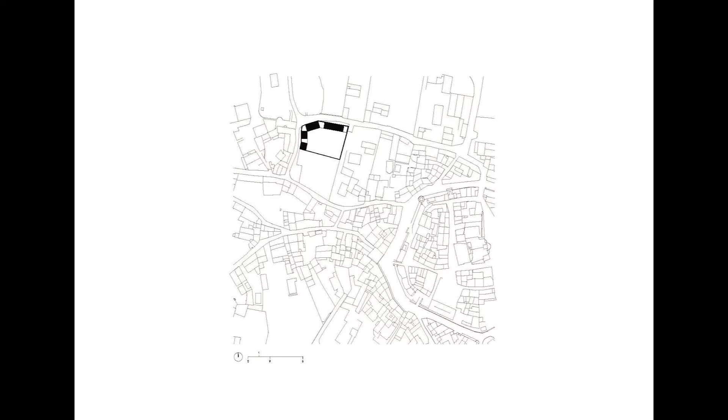It's a typical town in a place called Costa Brava in the north coast of Barcelona. Beautiful village, narrow streets, that kind of heritage that is more a thematic park than a real village, but it is that. This is a beautiful village with an old part of the city with that kind of wall, dense urban fabric, with narrow streets that go from the center to the countryside. The case of the house is a beautiful plot with an agricultural origin, with that kind of heritage. We are not different, I suppose, from the rest of the architects; we try to begin our projectual process trying to understand the reference of the context.

And in this case, the reference was absolutely clear. It was that huge, beautiful wall that surrounds the plot, and it was the main reference to begin the design process. So for us, it was clear that it should be a house that works linked, plugged to the wall, as large as the wall is, and it's a weekend house. So we tried to develop a very extreme house in terms of typology, because it's just a pure porch as large as the wall. This was a beautiful idea that became something like that. It was good for the client, it was good for us.

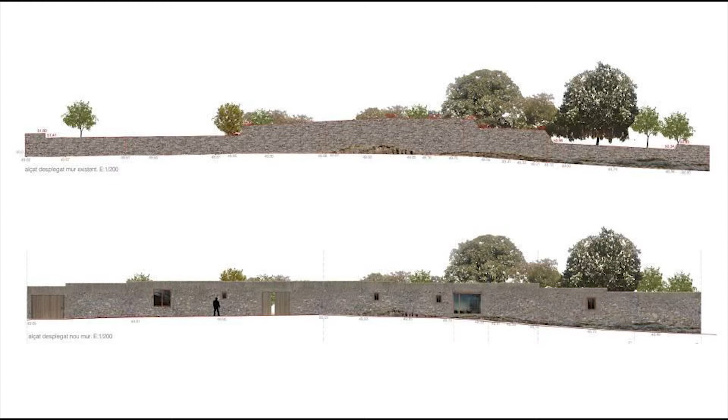So it was a big crisis for the office. But as we say in Spain, no hay mal que por bien no venga. When there's something bad, at the end there's something good. And in this case, that crisis meant understanding what is really important in front of the matter, which is the behavior of the matter, not the memory. The memory, of course, is beautiful, is interesting, the heritage in terms of composition, but the first step is to understand the real behavior of the matter that you have in front.

And from the point that it was impossible to maintain the wall in the same place, our decision was to demolish the wall and to rebuild again the wall, not just for memory, but understanding that the original stones were still able to work in a structural way. Okay, so the behavior of the matter was already there to be used again. So it's a clear case of reorganizing the matter.

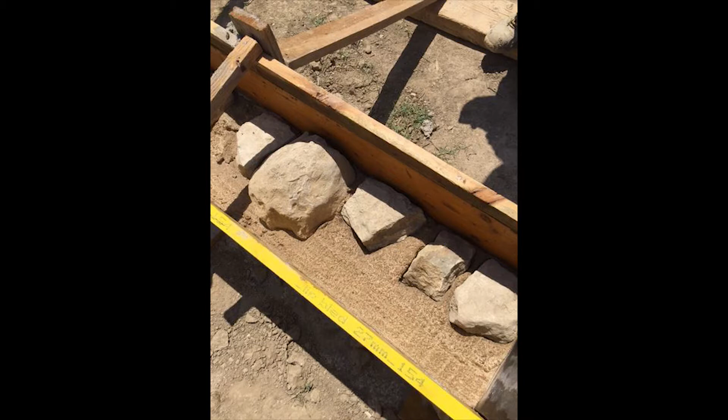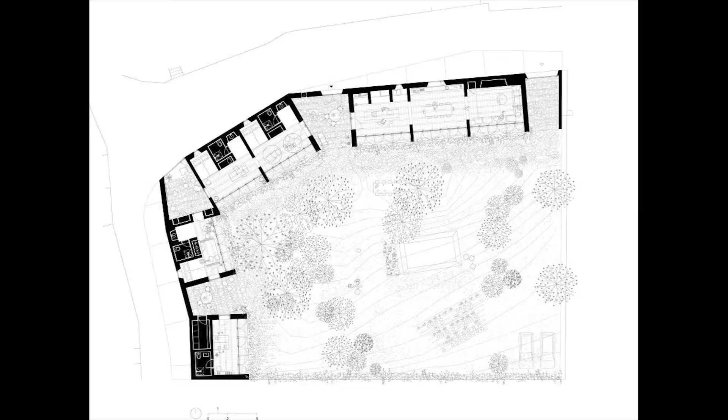So we mix the lime with the soil of the place, with the big stones like this in layers of 10 centimeters, doing this typology, which is a clear porch house. It's a little bit extreme. It's a weekend house where there's no heating system, there's no climate system apart from the passive behavior of the whole house.

And the wall was so big that we got stones enough not only to do the wall, but also to do the inside walls and also to do the pavement of the garden. At the end of the process, we just had to take off the thin layer of concrete that hides the stone to recover the color of the old stones. So I think for me it's a perfect example to explain.

Of course, I have some examples about different positions in front of the preexistence, in front of the heritage. But for us, the first approach in front of any kind of matter, any kind of presence, is to understand how it can work. So the new wall with the geometry that the council decided is like this. You can see how the old geometry has disappeared and has moved.

And on the other side, the house is just a full porch that faces to the south, that faces to the plot, and I have to say that it's incredibly beautiful. It's a perfect customer. I know that it's not always like this, but you have to imagine how bad the news from the council was. So it's a little bit of balance between the perfect client and the perfect place with a high-level difficulty process.

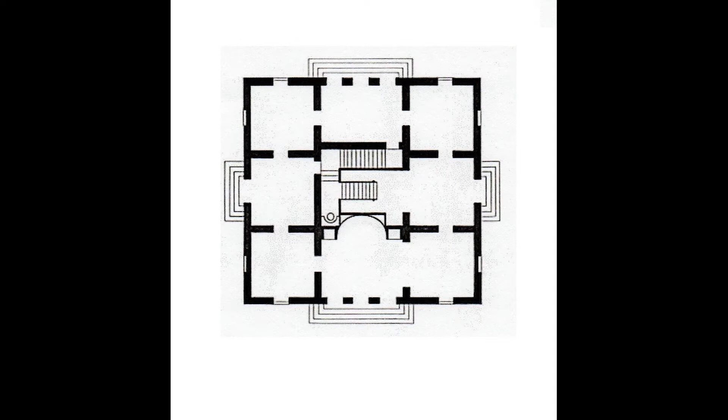We understood later that the shape, the form of that kind of vernacular that we were attracted to, was the result of a structural concept, which was the structural walls that just work in compression, okay? Then, like 15 years ago, we visited that building. It's not a vernacular example, it's not a popular construction, it's the Schinkel Pavilion in Charlottenburg, okay?

But it was walking through those cells, walking through that group of spaces, that we understood that the structural wall is not only an element, a structural behavior, it is also a system that not only defines the structural part, but defines the geometry of the space. This is something so simple, but for us it was like a big discovery.

There's a great professor in Barcelona called Ignacio Paricio that wrote an article about that idea, comparing the two big families in construction. On one hand, we have the multi-layer systems. That means that we use specific products or specific materials for specific answers to the demands of the building, okay? On the other hand, we have that kind of construction where structure and enclosure, structure and geometry of the space, are the same thing.

Paricio didn't say that one is better than the other. But he said that in the multi-layer systems, the specific layers can never get old. If they get old, it doesn't work. When a part of the facade of a new hospital or of a skyscraper doesn't work properly, the whole facade doesn't work. So it can't become older. It's impossible. It always has to be new. Doesn't matter if it's 50 years, 100 years.

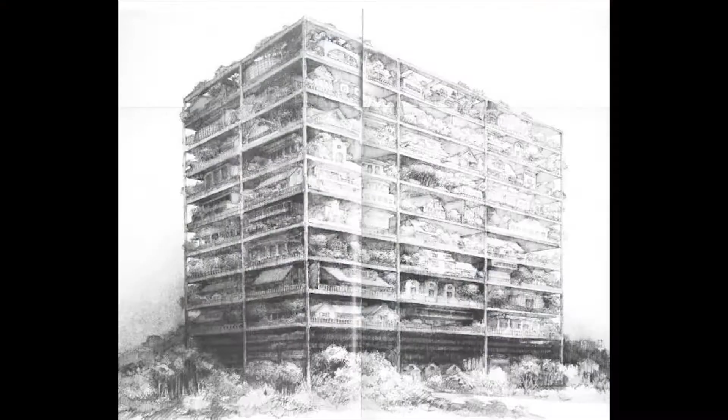Energy is matter, of course. It's a thermodynamic base, no? It's a topic of thermodynamics, so it's maybe the most obvious approach to the idea of matter, that energy is matter, and matter is energy. And what we've done was a little bit introduced in the house before. We have understood that buildings have two elemental parts: a structural part that is there to support the activity of living, the activity of people, and the enclosure, the envelope, that is there to protect the activity of living. Those two parts are in all buildings. It's an elemental part of construction and of architecture.

What we tried, and what we keep on trying, is to ask these elemental parts, structure and envelope and protection, to perform as many roles as possible. Not only to be structure, but also to be acoustic design. Not only to be structure, but also to be the geometry of the space.

Not only to be structure, but also to be the system that gives climate conditions to the space. The same with the skin of the building, not only to be the rainproof layer, but also, in this case that we're going to see, to be also an insulation system that gets gains from the sun, or that produces ventilation, and so on. Then, in our opinion, the elemental parts of the building, if you ask them to do as many roles as possible, become fundamental in the idea of architecture.

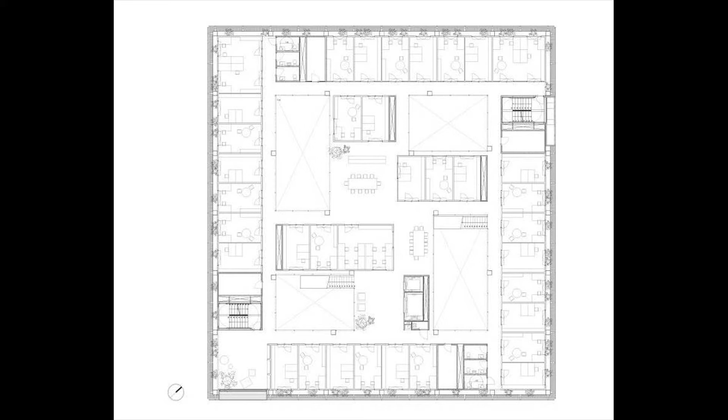It works by itself. What does it mean? It works in acceptable conditions thanks to the nature of the building. That means geometry and matter. Because of the inertia, the geometry, the cross ventilation, the kind of facade, it produces internal conditions by its nature. It's not thanks to a machine. Okay? That's not possible in the inside offices that have to meet specific standards of climatization, so it's the two kinds of climates.

In the end, we discovered that it was not two climates. It was at least 6 different kinds of climates in the building, and we dealt with that with a basic strategy. This is, in the end, a building that in fact is a greenhouse, a real greenhouse, a standard greenhouse from a catalog, built by a company that builds greenhouses, with a concrete structure inside with a lot of inertia.

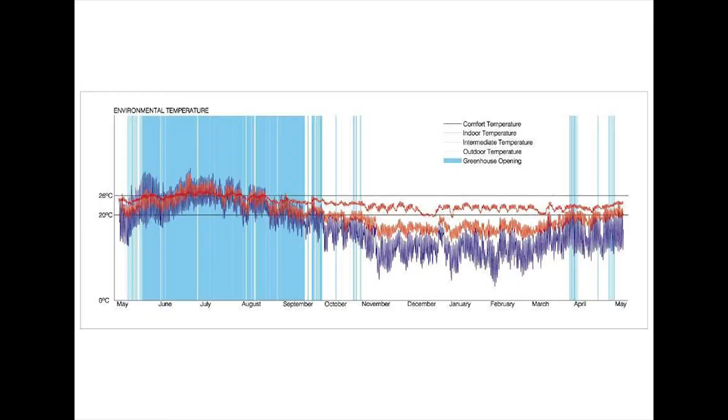That combination of the greenhouse working as a greenhouse in winter and as a shading system with a lot of ventilation in summer, also with the inertia, and trying to control with CFD simulation how the air is going to move in the building, got us to these kinds of diagrams: the intermediate space without inertia moves here, and with the inertia, just with its natural behavior, you get into 20 to 26 degrees.

So the two elemental parts are on one side the structure, and here you have the intermediate space, the offices. You have on one side that heavy structure, that we were interested in that idea of heaviness, not because of the beauty of the concrete, but because that amount of inertia was basic to stabilize, to give you the concept of inertia.

At least for us in Barcelona, it's very clear to understand how important inertia is as a possible passive strategy. What does inertia mean? When we live in Barcelona, we are close to the sea. That means the temperatures are always softer than at the same moment 100 kilometers inside the land, because the sea works as a big inertia that absorbs the excess of heat in summer and gives it back to you in winter. So that's the inertia concept.

It's simple, it's clear, and it's really famous that in Granada it's full of houses that work by themselves into caves, into original caves. Why? Because you have the inertia of the mountain over your head, and you move between 17 and 25 degrees the whole year in Granada with very extreme weather outside. So in the same sense, like a cave or like the sea, we try to put a lot of inertia into the building to stabilize, to make the temperature range softer.

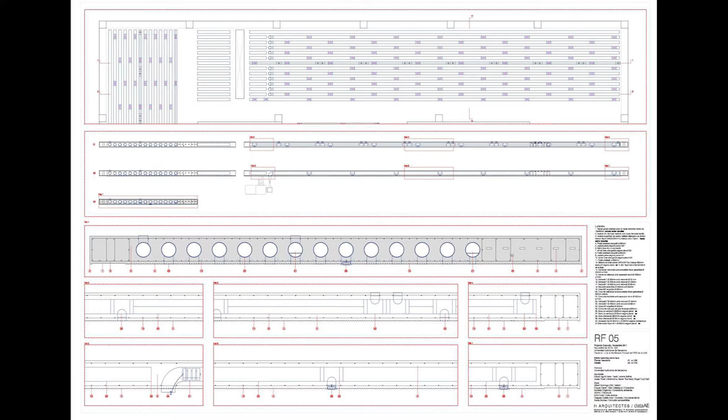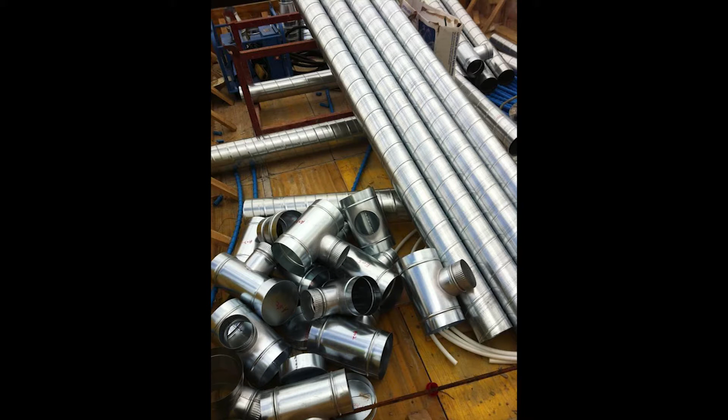But it's not the only thing that the structure assumes. It's not only the inertia, it's also the ventilation system of the building, the pipes that cross the structure. It's not only that, because it's also the system of the acoustics. The precast slabs have that texture to help a little in the acoustic comfort, and so on.

So it's that idea I was trying to explain, to ask the structure to have more roles than only the support role. On the other hand, the active systems are also in the slabs, so the slab became something very complex with a post-tension system and so on.

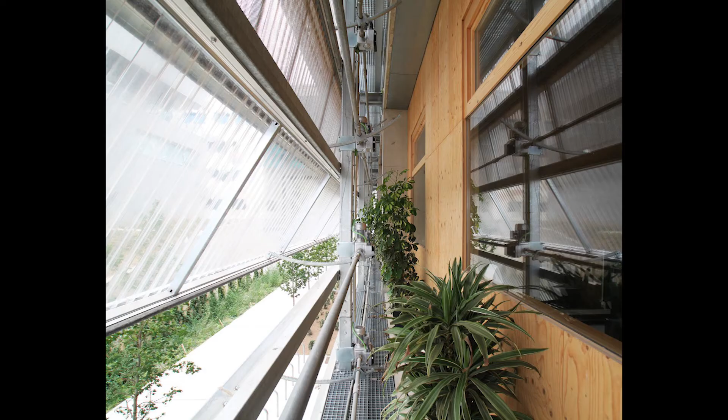And on the other hand, the skin, a skin that is able to be closed in winter and open in summer, assuming shadow roles and also insulation roles, that moves and mutates, changing in front of outdoor and indoor conditions. The skin is moving, trying to produce comfort conditions, not only for human living, but also for vegetation living.

Another way to understand the preexistence of matter, what is already there, or the idea that architecture is about reorganizing matter, is to understand that there is a type of already-there material which we call product. A product, a brick, a timber panel, a CLT panel, is a product that exists before our projectual process. So in the same way, we try to understand what the specific behavior of that product is, as a way to develop our design process.

So, what here, well, it's an example about—it's not exactly the same, but that idea to deal with the catalog architecture.

We did that students' residence, which is a complex situation, because it's a residence for—we teach in the same school where we studied in the 90s, and we won the competition for the students' residence. That means a competition where all the colleagues in the school were interested to win. So it's a complex process in terms of getting enemies during your life, because not only the colleagues, but also the students that you then meet at the classroom, maybe they are angry because of our design. It's not the case, so we're happy to say we have no more enemies now than 10 years ago. But this competition is an interesting process.

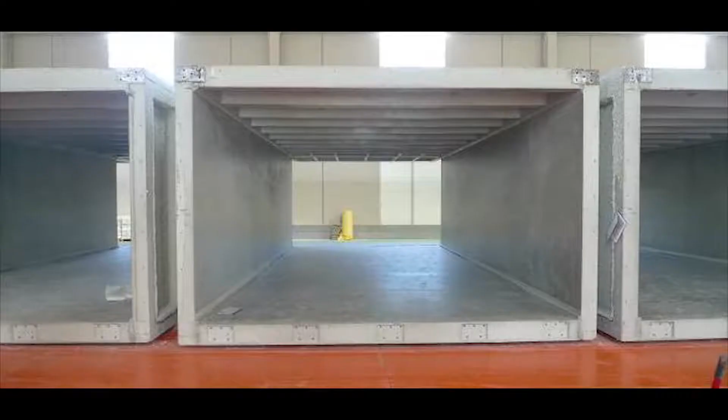So the one who won the competition for the management was not a professional of management, but a professional of construction specialized in building this. The main condition for the architectural competition was that we had to manage with this product—a clear product. And it was not our idea or our decision to work with this.

We assumed we won the competition for several reasons, but the important and interesting part of the design process was to understand the positive parts of the geometry of the matter and give value to that, because you have to imagine that the builder who produced it was absolutely ashamed of its own product.

For him, this is just a skeleton, just a frame to place plasterboard, plaster, cardboards, furniture, curtains, to hide the concrete. This was necessary because the concrete was not enough in terms of fire protection—it was too thin. In terms of acoustics, it also needed something else.

So our design process—and this is the interesting part to explain that idea of product, to understand again the attributes of the matter—was to see how to make it better, to let it look as it is. We worked with the engineers of the company to see how to put another steel bar that assumes, in case of fire, the structure can be non-protected, or to add more insulation for acoustic conditions. Just to ensure the good part of the product was kept: the concrete aspect, the geometry, the heaviness, and the inertia.

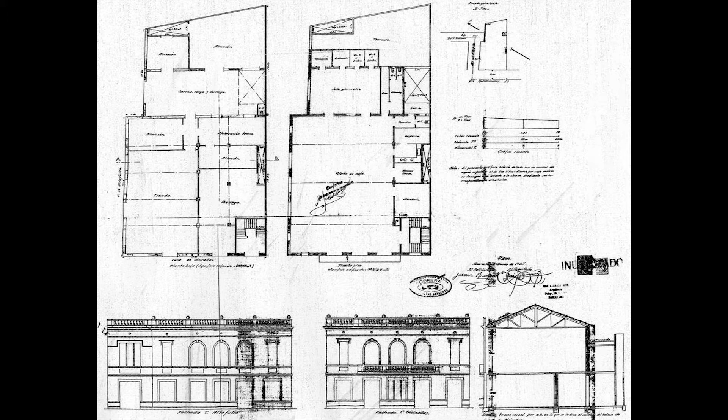So we respect the facade because it was also a condition of the competition, but on the inside, the building was not catalogued, was not protected by the council, so we were free to demolish the whole building.

What we decided, by understanding the original project—because the building was closed for 15 years, and during the whole 20th century after the Civil War it went from a sweets factory to a disco to another storage space and a lot of different programs—so the original architecture became very blurred through the years, and we tried to recover the original project to understand the structural parts of the building at the moment we began the competition.

And we saw that the original project was not specifically interesting. In fact, the architect never visited the plot, because the street has a very serious slope, and in no plan is the slope of the street accounted for. So it's not an incredible architecture example.

In fact, it's not protected, it's not catalogued. But our approach is again to understand the attributes of the matter, and in this case the attributes of the building. So we decided that not all the spaces were interesting in terms of quality, but there were spaces that, regardless of architectural quality, could work again in terms of program with new uses. So we decided to demolish not the whole building, but just a part that responded to part of the original program.

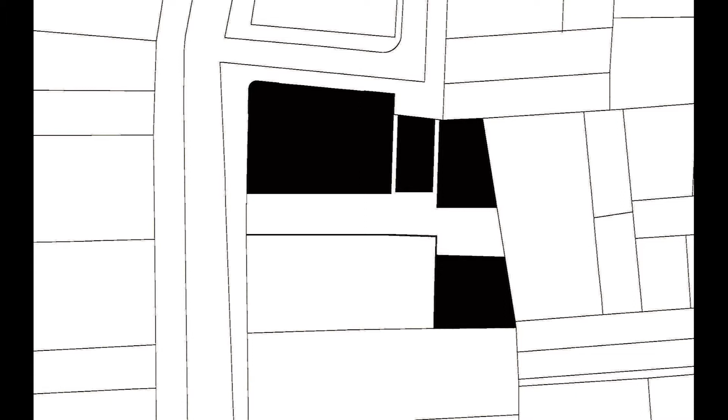And thanks to that decision, that very specific and well-controlled demolition, we produced that idea of void, of emptiness, that in fact is not an emptiness—it's a street. It's literally putting the street into the building, but not with the conditions of the outside space, rather with the conditions of a new kind of space that works in a very passive way, but gives new attributes to the whole building.

So the new space, that new void, that street, gives, for example, a new attribute in terms of circulation. So the original way of circulation of the building disappears, and there is a new way. That street is the space that gives a new structure to the circulation of the building.

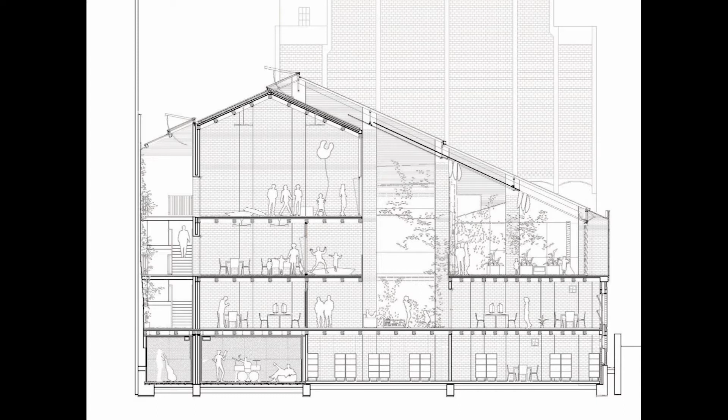At the same time, it is the space where all the inside and climate spaces put the dirty air, the CO2, because that part of the building, thanks to the roof that gains sun gains and works as a chimney, moves the whole air of the building. And at the same time, of course, that gives ventilation, gives sun gains, and at the end the building is like two types of spaces.

The original spaces that can be reorganized and that still have attributes enough to assume new programs, and that new kind of emptiness that has natural conditions, passive conditions, and also again that idea of unprogrammed spaces.

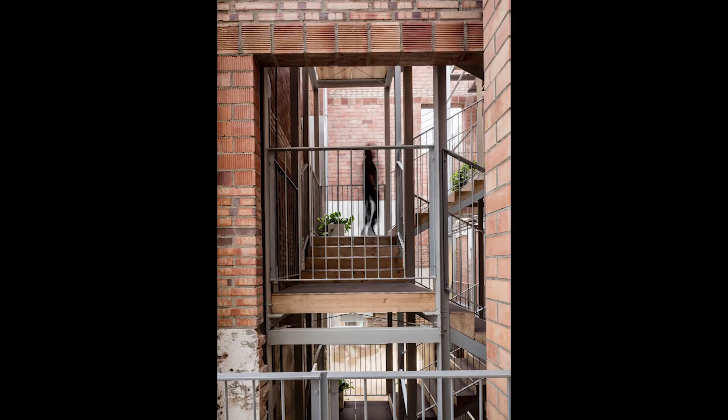So the new void: circulation, sun gain, ventilation. The roof is the only place where we get sun from the south, and this is the way that, thanks to a greenhouse effect, the whole movement of the air of the building goes up because of the heat of the roof.

And on the other side, the original spaces of the cooperative that used to be storage or a multi-purpose space for socials, and now it becomes a theater because of the geometrical conditions or also the acoustic conditions or the natural light conditions, means that old space can assume new programs, new roles.

And the last approach, our interest, I always use that image, which is a diagram that my partner did for his PhD. This is a serious diagram. It looks so simple, but it has a very interesting idea inside. That diagram was done doing the calculation of the weight of a house, a 100 square meters house,

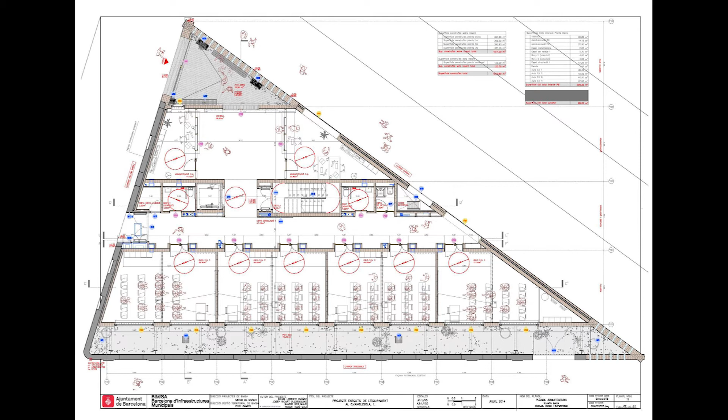So what we try in terms of program is to do such a simple program, very well structured, with a corridor in the middle and program on both sides, doing those structural walls, but assuming that the large parts between walls have to be as flexible as possible, because maybe in the future that program will change. The good part of the triangular shapes is that the proportion in that building between classrooms and administrative part is very fixed, mixed very well with the triangular shape, because 70% of the program is that part, and the 30% of the program, which is the administrative part with the same structural size, fits all right in the north part of the building.

So every wall that you see is again a structural wall, a series of walls with no structural walls in the other direction, assuming that idea of flexibility that you can cross from one side to the other, arriving to the classrooms, where you find that relation with the old facade through that courtyard.

To talk about time, of course, is to talk about memory again. But again, in this case, here is memory in terms of composition. But first of all, what we did in the project was to understand how able the original wall was to work as a wall. The heritage facade works in the new building structurally, assuming the weight of the new facade, which is on top. Okay? Not only giving us inertia and helping the climate conditions through the courtyard, not only helping the natural light through the holes, also helping in terms of a structural role, assuming the weight of the facade.

And of course, it's memory, and for us it was a nice decision to make the new building work in terms of structure as the old building used to work. The old factory, of course, worked with structural walls made of stone, with no steel bars, with no reinforcement, and so on.

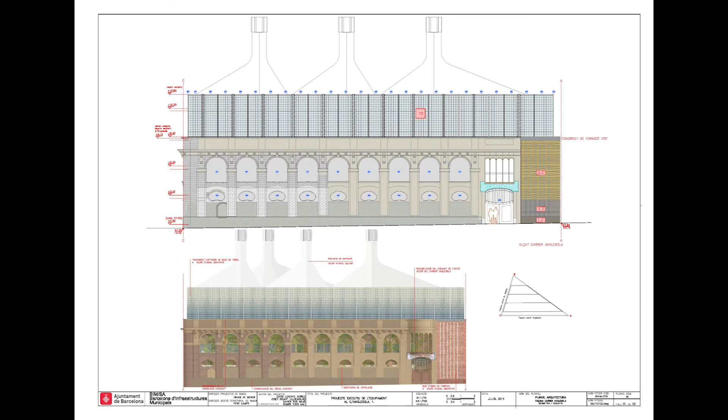So not only the facade, also the greenhouse stands up over the old facade. The wall really is a greenhouse made with structural walls that work as a structural wall. That means it is done with glass bricks, and the bricks work as a regular brick, standing up over and transmitting the weight over the old facade. Here you can see that idea that I explained at the beginning, the courtyard that has become a greenhouse, and in summertime all those holes get open, also the ceiling gets open to work as a garden.

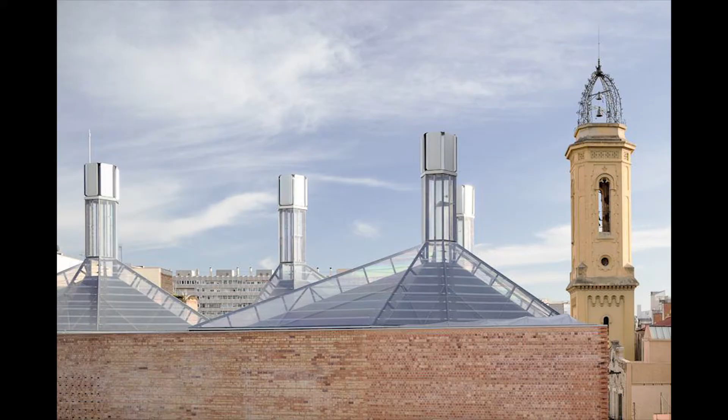But the interesting part of the building is the roof. Those are 4 sun chimneys, which are a very simple invention. You can find a lot of interesting videos on YouTube about how to do a sun chimney for your son. You don't have sons, but I have.

So I've done that kind of very easy sun chimney with a plastic bottle. You just cut like this, you put a balloon, and if you put it in the sun, just because of the heat, the air goes up, right, and the balloon pumps up, and so on. So this is a sun chimney. It's a physical invention. It's nothing new. But it's an incredible engine. In fact, the new electric power stations in the desert are based on the sun chimney effect.

Okay, so this building has active systems, but the basic idea in terms of behavior is what I've been talking about: inertia and cross ventilation. Okay, but the plus of the building is to produce that cross ventilation with a natural engine, which is that part. So the building works like this. The natural air goes from outside, because, I mean, ventilation is pretty important in that kind of strategy based on inertia, because you have to dissipate the excess of heat.

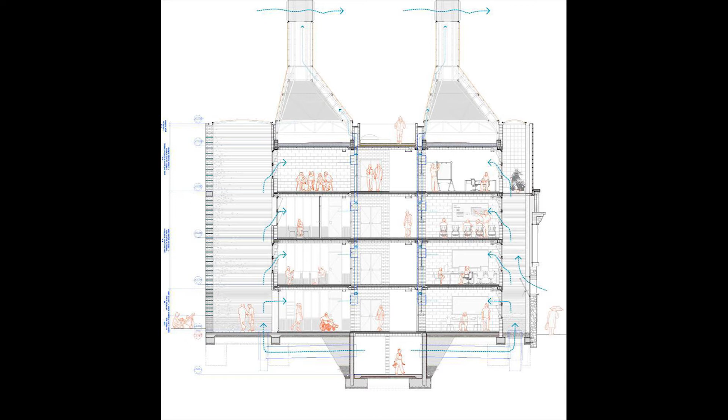So the air comes from outside, goes through the basement, goes into the courtyard, getting the freshness of the soil, comes into the courtyard, and then the windows open, the air crosses the classrooms, and the air goes up because of the sun chimney. The sun chimney draws the air because of the greenhouse effect of the chimney.

Because the sun chimney in this case is based on 3 natural engines. On one side, the greenhouse effect. There are 2 layers, a black layer and a transparent layer. So the black layer in summertime, not in winter, but in summertime, comes to 90 degrees. At midday, 90 degrees means that the air that is between the 2 layers, between the transparent and the black layer, gets a lot of heat energy and goes up very fast.

That air that moves has to be substituted. It needs a substitution that comes from the air from the classrooms. Okay? So the first engine is the sun chimney effect based on a greenhouse effect. The second natural effect is what we call chimney effect, the difference of pressures between the air at the top of the vertical part of the chimney and the air in the classroom. The difference of height means also a small difference of pressures, and that means, again, a movement up of the air.

And the third natural effect is the Venturi effect, which is in the hat, at the top of the whole invention, which is, again, a catalog invention. This is called Aerospirato. It's in a catalog. You can buy it. You can see it on a lot of industrial roofs. It's very common, and it's not expensive. We need that third invention.